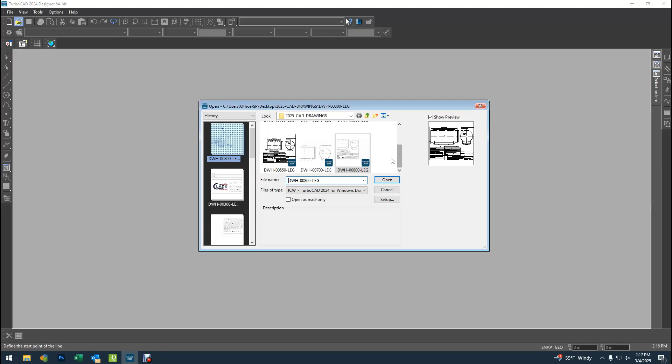In this video, we are going to do some finishing touches to some drawings that we've completed. I'm going to go ahead and open up the 800-gallon tank. I'm going to do the finishing touches to this one, and then you're going to follow along with the video so that you can do the finishing touches for all of the others in this series that we worked on.

The first thing I want to do is show you something to begin with. Going forward, when I send you these sketches, they're going to be just for reference on your spacings between your openings, your overall dimensions, and your dimensions between your supports. I don't need you to make any edits to these because these sketches are pretty old and a lot of this stuff under specifications has changed.

So I meant to tell you that and I forgot to. But that's okay. I had to do a lot of edits today to the specifications table anyway because I had to make some changes to reflect some new things. So I've got all of this changed the way that I want it, with some new ways that we do things. Some of these thicknesses have changed on some things in the construction.

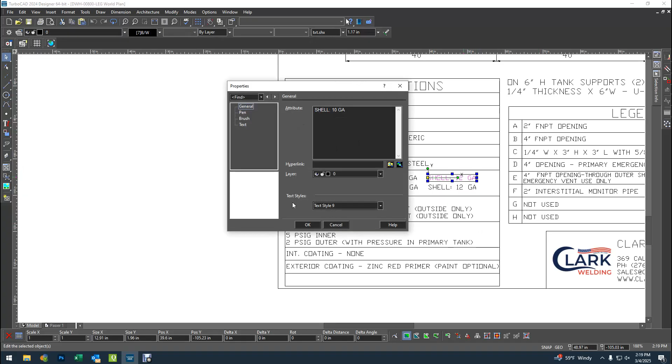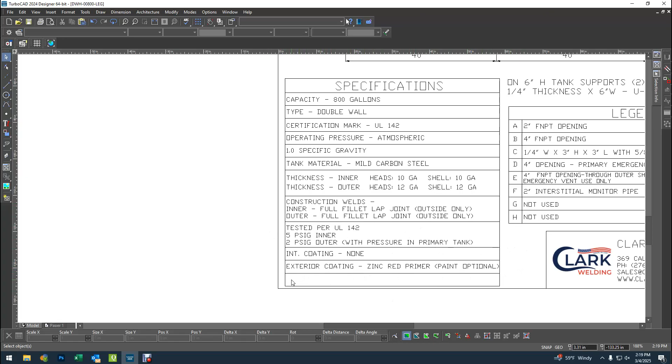I wanted to give the end user a little more idea about the type of weld that we do, and the test is different now than what it had been. I made some additional notations about the primer and just rearranged some things, and allowed myself an extra line in case I'm working on a special project and have to say anything in the spec that someone might need to know. I've got an extra line there.

And in the legend, the only change I did was I scooted this over. But when you get your new templates, all of this is going to be reflected in there. So the only thing you ever have to change is your capacity. You want to make sure the capacity here and here matches what you're drawing. You don't have to make any other edits there.

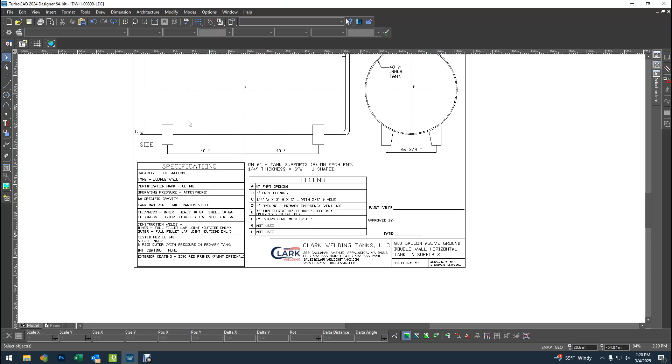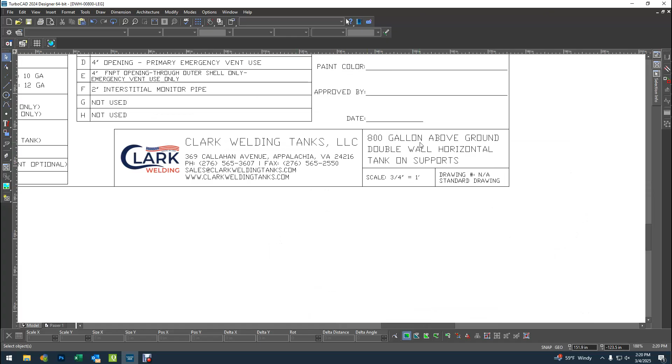This one is tricky because normally I do want this in the upper right corner. However, we're constricted to space here. When we go up to the next size, we're going to be working on a different scale where there's going to be more space here to draw on. But since this is the biggest one in the scale, everything is very tight.

So you won't have to rearrange this in the future, but I'm going to today just to give us some more space, because I want this label that says 'side' to be up at the top, and I want the label that says 'end' to be above this. I always want the end label to be in the upper right, and I want the side label to be in the upper left above what you're drawing.

So I need to make a little more space here. You're going to see me move this and this, but that is for this drawing only. You won't need to move it for your other drawings—you'll have plenty of space. However, if you do get in a place where your space is confined, you can move those if you have to. So I'm going to move this down just a little.

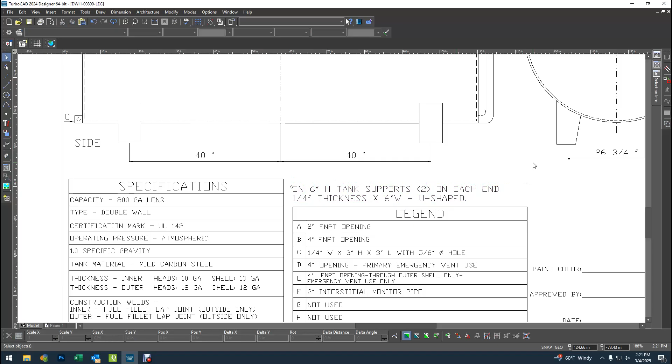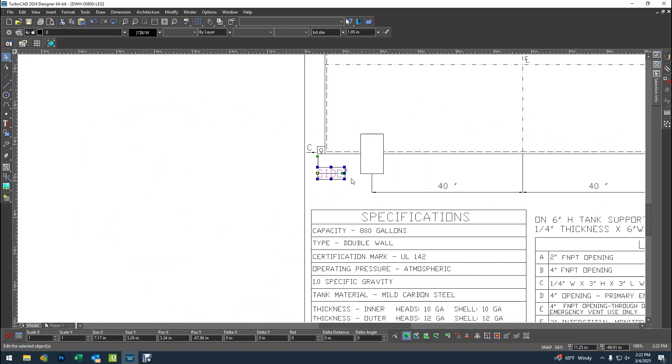And I'm going to take this group of text and just put it over here. This is going to give us some more space at the top so we can do our side and end labels. So I'm going to move this out of the way—I'm just going to scoot it over.

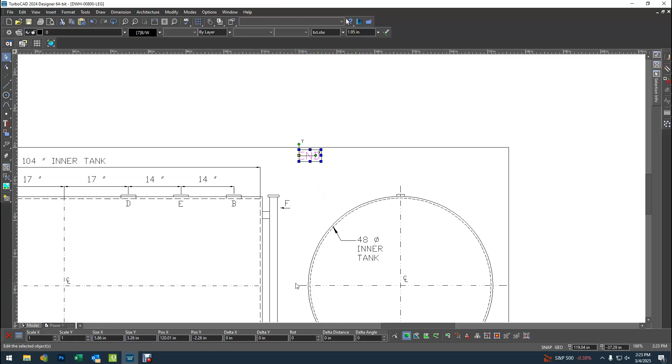I'm going to look at this. I'm not going to drop it, but I'm going to see how we align. And it looks like position X, if you can see down at the bottom of the screen, is 120.01. So I'm going to take it back up here and put it at 120.01 for position X, which gets the end of this in line with this. All right, I want to pull all of this down.

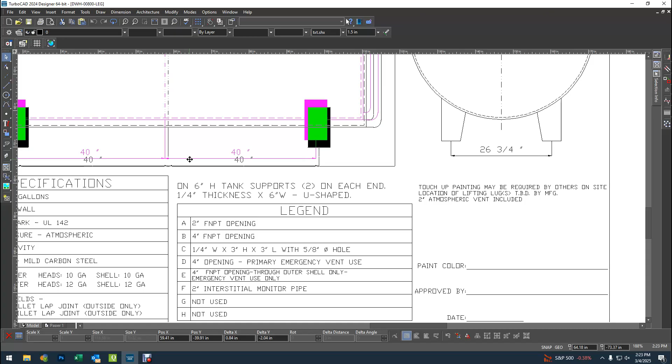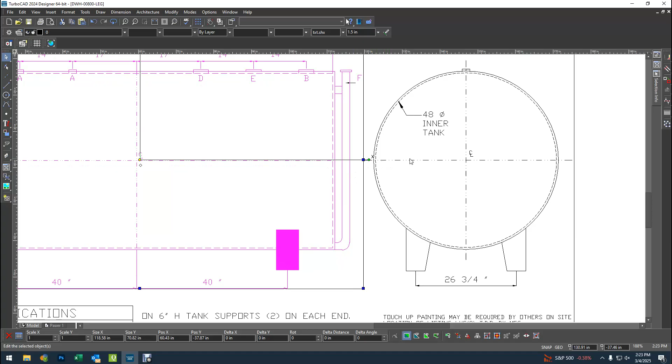I'm leaving just a little break between the dimensions and the specifications box. I'm a little too close to that border, so I'm going to try to make some more space here where I can pull, and also try to align these center lines up. I kind of want it even with that center line.

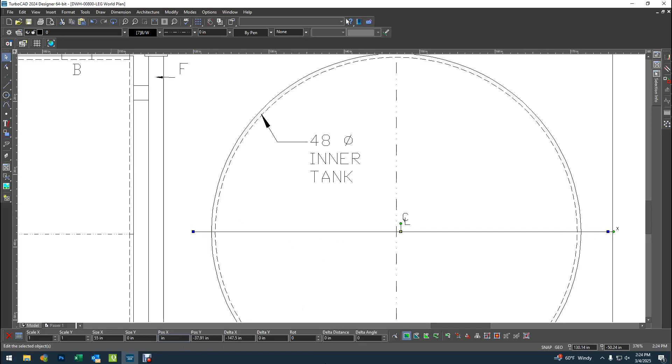I think this is a little big. And this is probably my fault because I'm the one that drew this, but if you look, this is just a little wide here compared to over here. I'm going to shorten this whole line down from 147.5. I'm just going to make it 145.

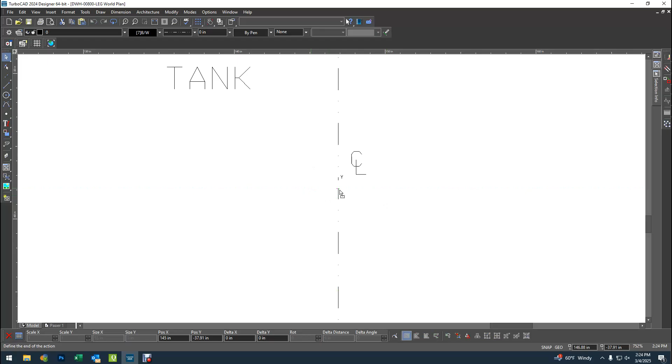Now I'm going to hover my mouse over this yellow dot, and I'm just going to snap it. See the pink diamond in the middle? I snapped it right in the center, and that makes us just a little bit more room. Because this one is so tight, we have to utilize all the space that we can.

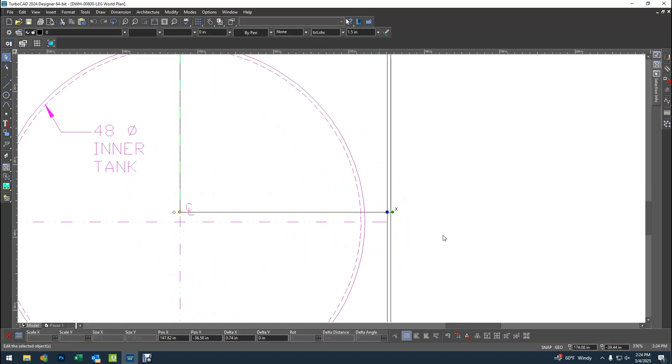So we're just going to slowly drag that over just a little bit. You're not going to run into this on the ones that you fix. I'm fixing this one for you, and you're going to fix the others, so you won't run into this, but I'm just showing you how I do it if you run into a situation where things are tight.

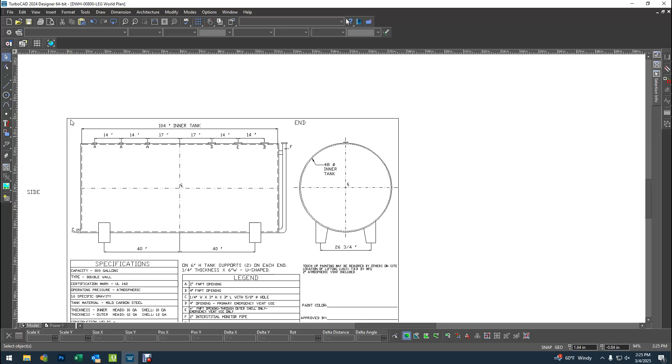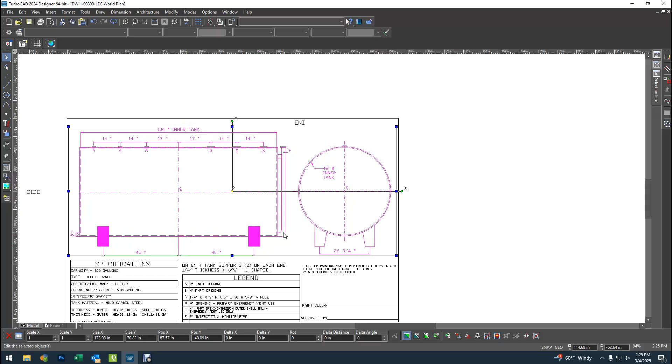I'm thinking we've got more space to pull all of this down. So I'm going to start over here, draw a rectangle around all of it, and deselect. I'm just going to gradually pull this down. Looks good, I'm going to drop it. Okay, I'm going to drop that and leave it alone now.

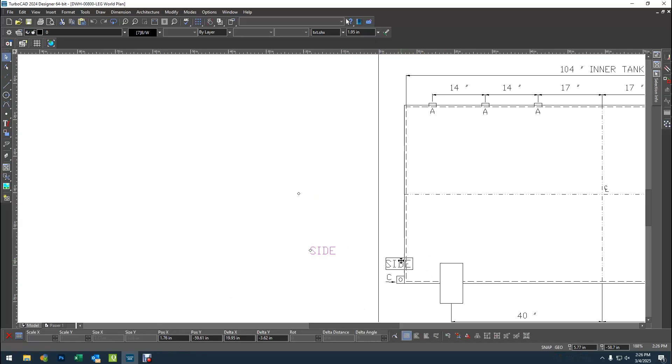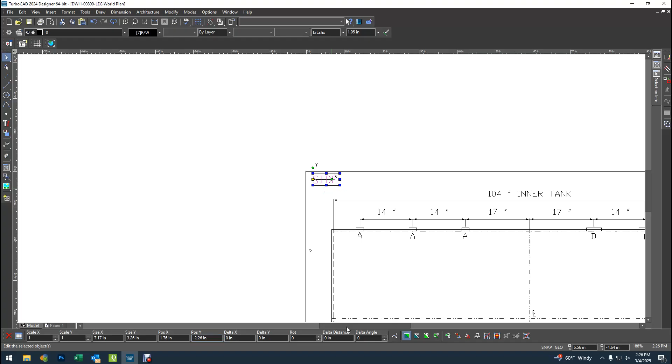I want to put this side up here, and I'm looking at the position. I'm paying attention to position X, left to right. I want it positioned at 1.76, but up here the same as Y, minus 2.26. So 1.76 minus 2.26. If I didn't want to do it that way, I could always go to Modify, 2D Align, and Middle. Either way you can do it.

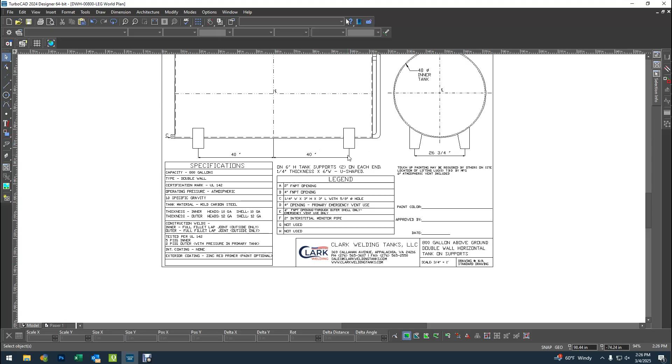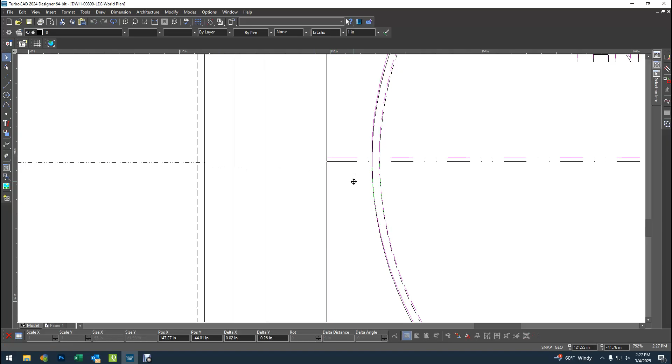All right, right here our center lines are aligned pretty good, we're a little off. I'm going to drag this one on down. I want those center lines to be real close together so we know we are in good alignment. But there's something still wrong.

These legs look longer than these legs, so we've got to find this out. What's going on with this? All right, so your legs always measure from the bottom of your tank to the base of your leg. If you're watching where my mouse is going, bottom of the tank to the base of the leg is always 6 inches. I don't think we have 6 inches here.

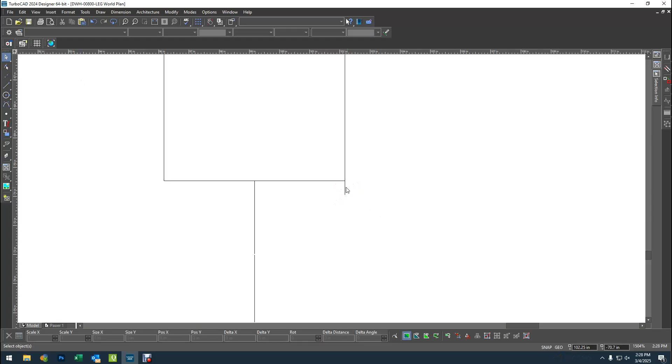Let's take a look. I'm just going to use a temporary line to measure 6 inches. Look, we're a little off. How can we fix that without having to redraw this whole leg? I'm glad you asked, I'm going to show you.

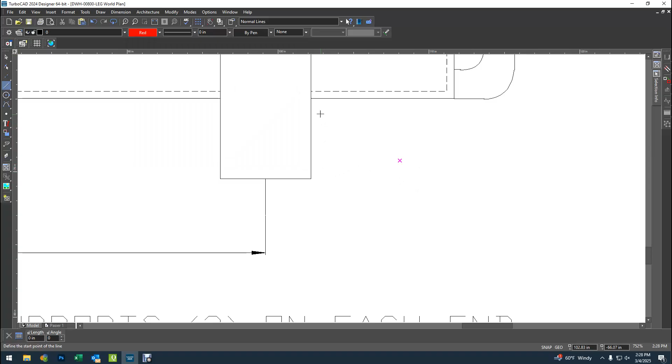Let's use some temporary lines here to do this. I'm going to make them red so you can see them. All right, we know that from the bottom of the tank to the base of the leg always has to be 6 inches. So I'm going to snap this temporary line right here in this corner of the bottom of the tank, and go down 6 inches, 270 degrees.

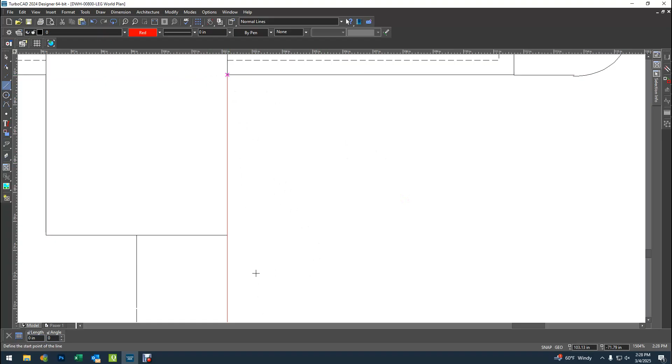That looks like a big 6 inches. Is that 6 inches? No, I have my hands on the wrong key on the keyboard. I'm not using my normal keyboard right now because I ordered a new one and I'm using a temporary one, and I keep getting my hands on the wrong keys. I hope Amazon brings my keyboard today.

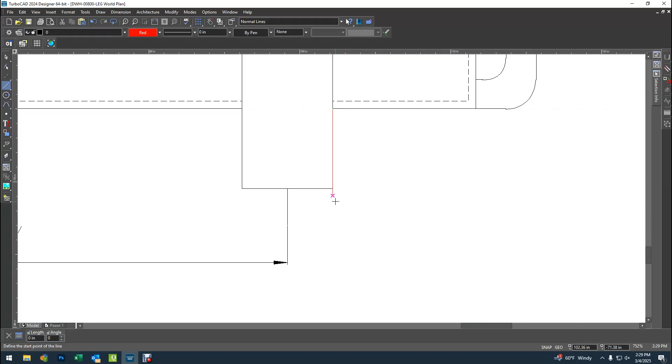Okay, so we did a temporary 6-inch line because we know from the bottom of the tank to the ground has to be 6 inches. Now we're going to do another little temporary line here in the corner, and we can do that at any size because we're going to be deleting it. I'm going to do a 2-inch line at 180 degrees.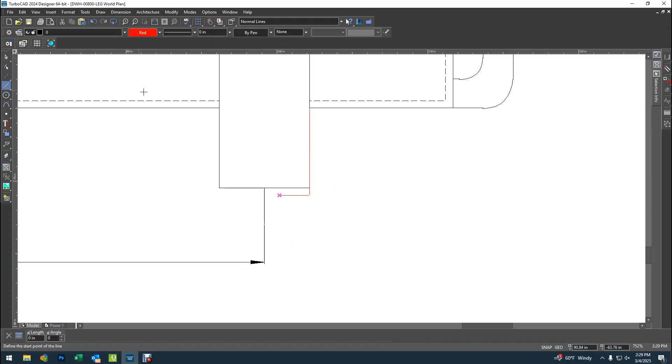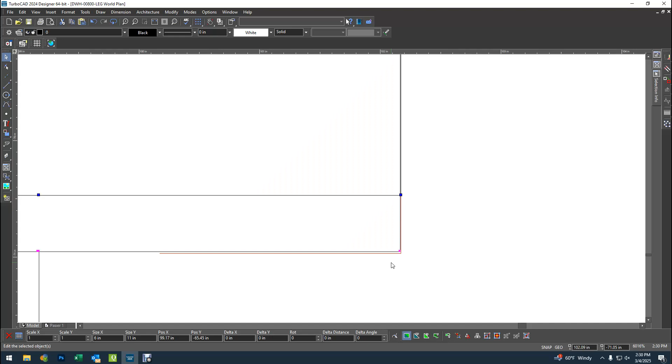Now, to move the rectangle down, all we have to do is highlight it, get close to the corner, and we should be able to pull it down and snap it. Can we? Oh no, I did that wrong, don't do that. I'm going to Control-Z that. Sorry, all right, here's what we have to do.

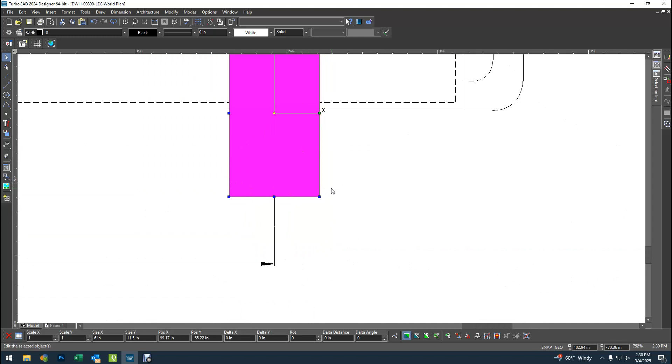We're going to take this little box in the corner, so we select our rectangle, take this little box in the corner, and we drag it. As you can see, when I meet that corner I start getting those purple lines, and I also get to the right of my mouse cursor that little diamond, and that tells me it snapped right in there. Okay, so we're 6 inches to the ground now from the tank. We know that because this temporary line I'm deleting now is 6 inches.

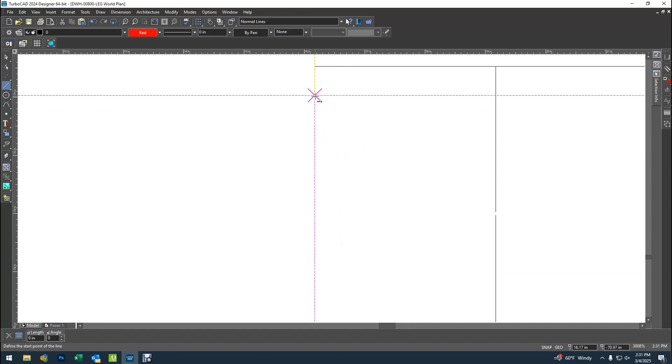Now we're going to get rid of that. We got to go over here and do the same thing. Take this and we're going to do a temporary line right here in this corner. Snap it in. We're going to go down 6 inches, 270 degrees. I'm working in a little bit of fast motion now because you already saw me do it once. 1 inch, any length we want really, because we're going to delete it. And there's the red temporary line.

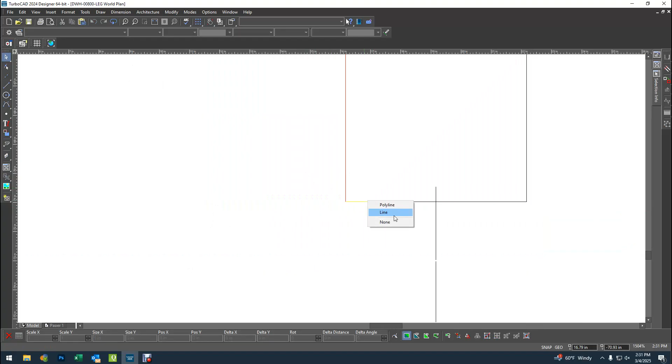And we're going to highlight the rectangle, and we're going to come in, and we're going to pull it down till we get that diamond, and we're going to snap it. And we're going to delete the temporary lines. And so now we know that our legs are 6 inches from the ground.

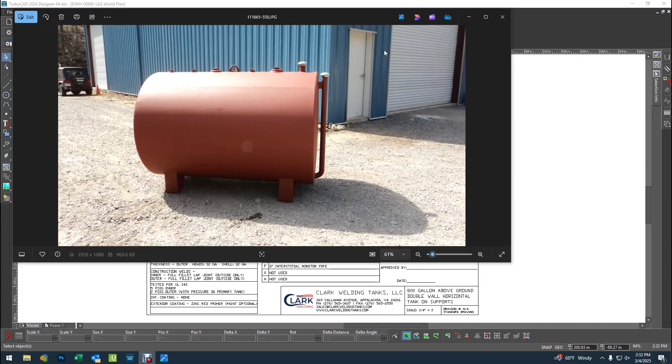And I'll just show you something. Hold on. So this is what I'm saying, that from the bottom of your tank to the ground is 6 inches. Okay, and so you can kind of see what's on that end view. You can see that it goes down, over, and back up at an angle. And so it's kind of what you're looking at. That's the inside of this end view. Down, over, back up at an angle.

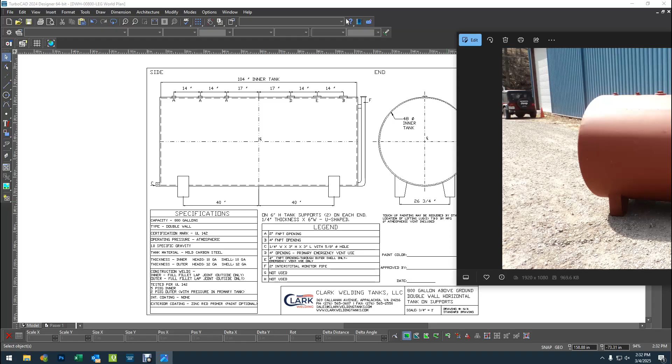So you're always longer out here and you're shorter in here. And so from here to the ground is always 6 inches. I'm going to close that out. We want to make sure that the height of this rectangle, which is saying 11.5 size Y, we always want to make sure that it's the same as this line right here, which is saying 11.84. So we have to make this taller.

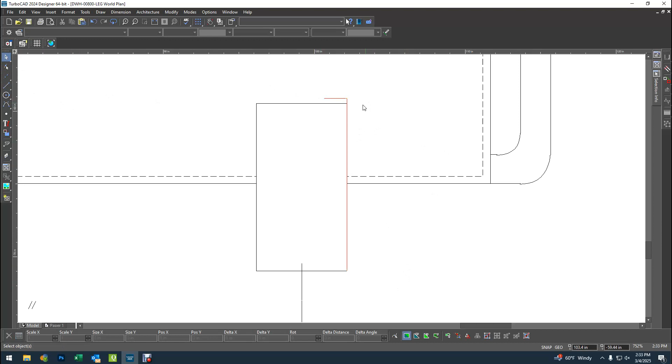Now, an easy way to do this, to adjust this without having to redraw, is another red temporary line. We're going to go up 11.84 and we're going to do 90 degrees. And we'll just do another little leg of a rectangle here, any length that we want, 180, because we're going to be deleting it. Okay, so we've got this temporary upside down L-shaped line, and we're going to take the square corner and we're going to snap it into the corner of our temporary lines. Now let's delete the temporary lines.

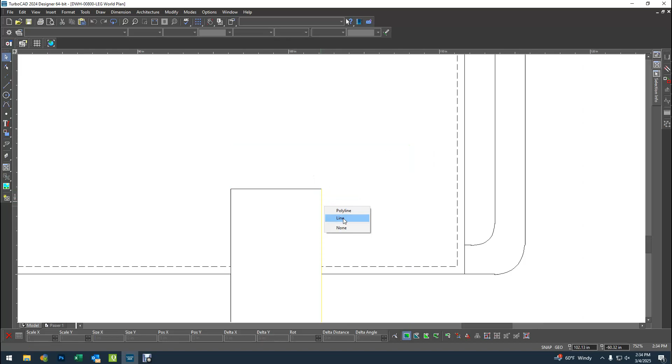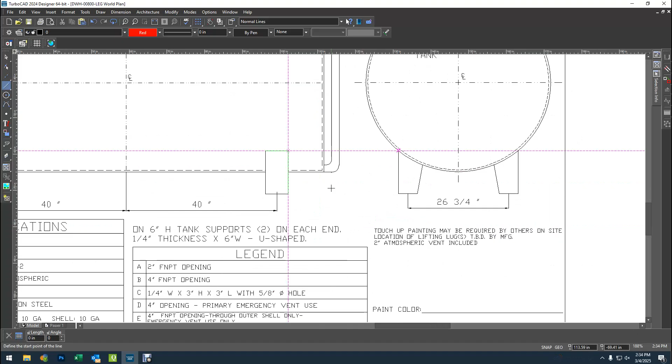And that looks pretty good. Are we even? Let's check. A little off on that angle. We maybe need to do a little more aligning there. But we're pretty even, so I could probably scoot that down just a little bit if I want to be real precise about it.

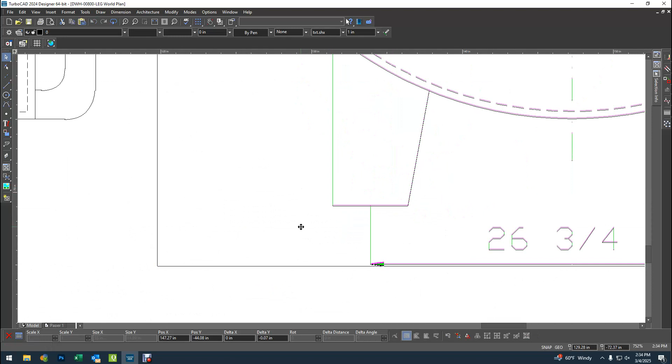I'm just going to pull it down a tiny bit. You don't have to be that perfect with it, but to me, I just want to make sure I'm not seeing it look like it's off any. So I think that's pretty good.

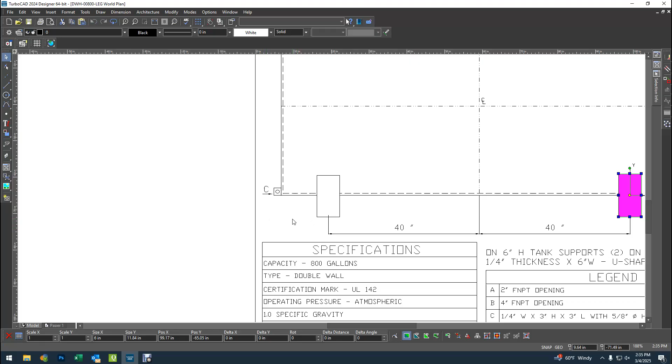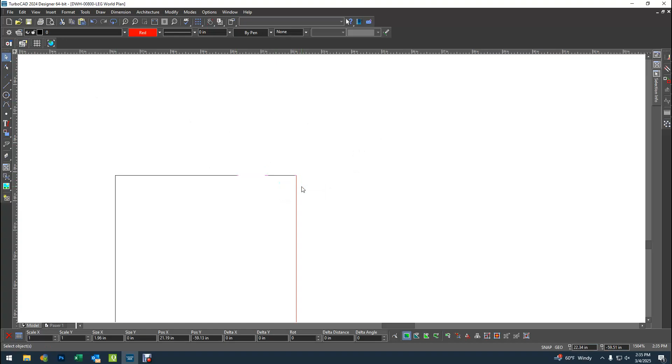Okay, so over here we want to do the same thing. Our height needs to be 11.84. So we're going to do temporary line again. 11.84, 90 degrees. There again, any length that you want. And drag and pull to the corner. Delete this temporary line. Delete that temporary line.

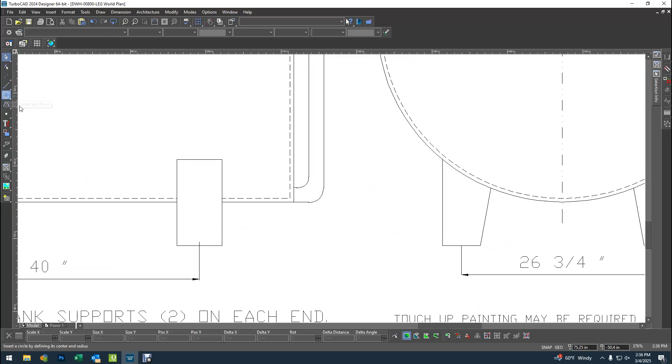Okay, so we got some good precision there in our views now. Our legs are the right height. Our side and end are aligned. And so the next thing that we want to do is we want to work on these dimensions and make sure that we get those good and consistent.

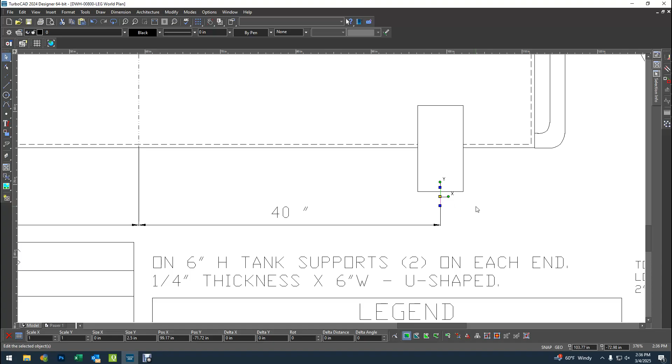And we don't have to redimension them, I don't think. I think we just have to do a little bit of adjustment here to the height. And I'm seeing a temporary line here. I don't know why that's here, but I'm going to get rid of it because I don't really want it on there. I'm assuming it was the temporary line, so we're going to get rid of that and those two and make them go away.

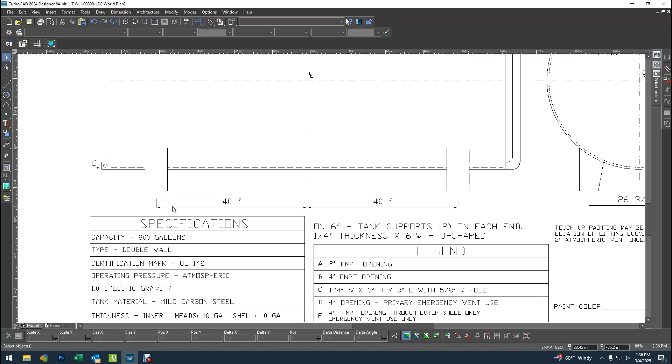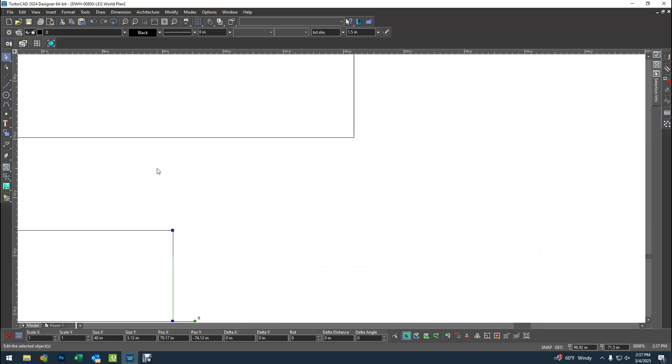And I should be able to just pull and snap now. Yes, and it has been taking me a couple of tries to get it to snap in, or at least get it very close. See there, it's very close, but it will take two times. You've got to select it, pull it up till it snaps. Select it, go over here almost to the corner, pull it up. You're snapped in pretty close.

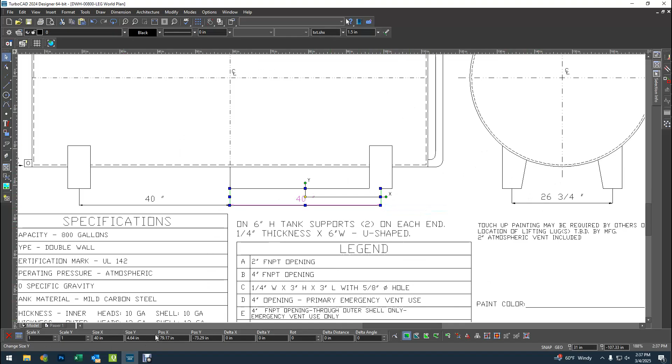That's good. Let's look at the height of this versus the height of that, because to me this one looks a little taller. The height of this is looking at size Y, we're at 4.64. I'm going to jot that down, 4.64 inches. I want to make this one, the height of this one, be 4.64 inches as well.

I don't know what we got going on here, but I realized I drew this, so I'm sure it was my fault.

This is 4 inches. I'm going to get rid of this and redo it. Okay, let's go to Dimension and Smart, and we're going to find this invisible line that we had.

Oh, that's outside to outside. We never do outside to outside. We always do center to center.

This line right here at 31.75, see how it goes from outside to outside? I'm going to get rid of that. I'm going to draw an invisible line from center to center. So here's the center, you can see it snapping in, and I'm going to draw to that center. If you look down at the lower left, it is 26.75 length. So that's good, I'm going to make it invisible.

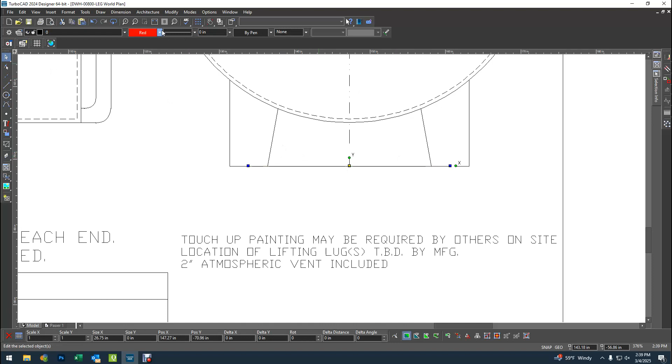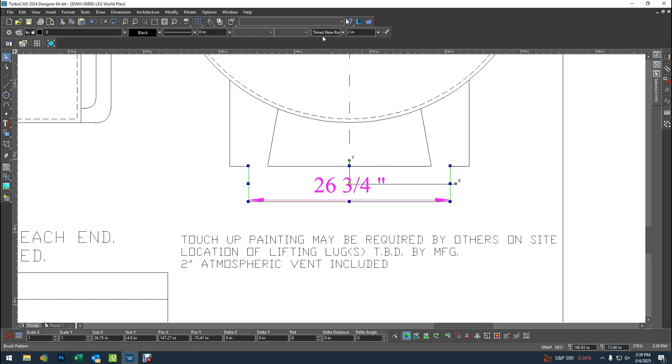And I'm going to redraw that dimension. Dimension Smart. And I jotted down for the height earlier 4.64 in length. It's 4.64. And we will just change that font, txt.shx, and 1.5.

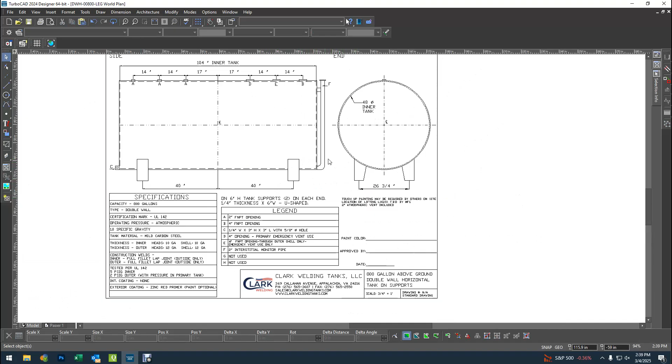Very consistent, everything is lined up good. Everything is even. So we've got that finished. I'm going to save that. Everything else looks really good here.

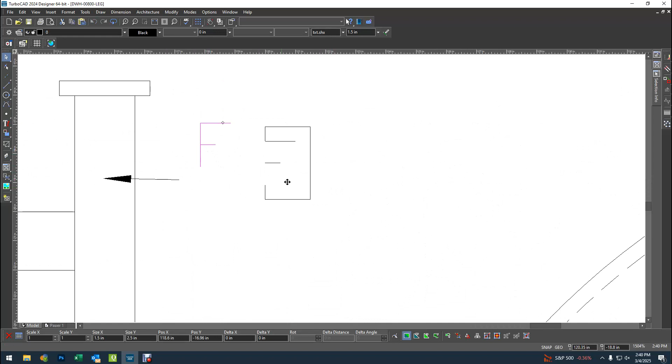Oh wait, we need to fix E and F. We got to get these fixed. They're just not looking right to me. I'm going to pull this over out of my way.

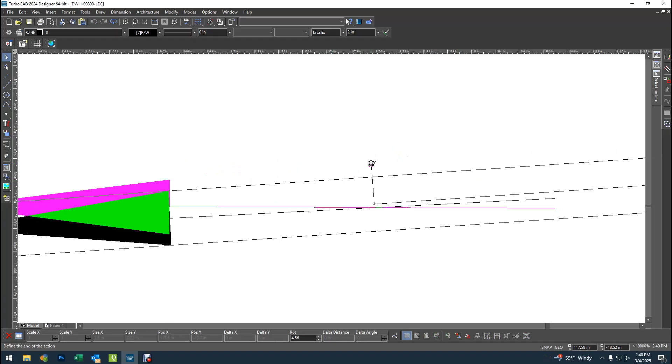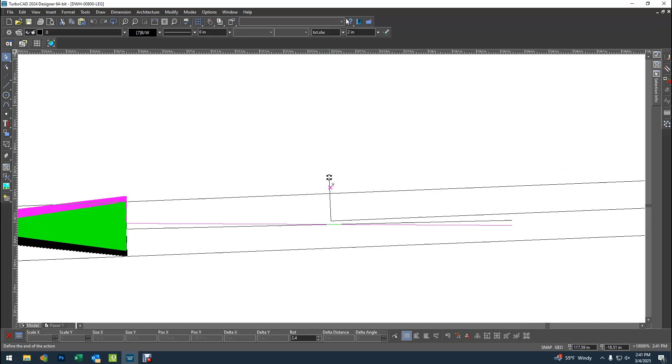I'm trying to make this arrow a little more straight. We always have trouble with these leader arrows. See, I'm trying to use this green. Since we can't get it straight, we may just do it angled. It's really hard to get it straight. Let's try this one.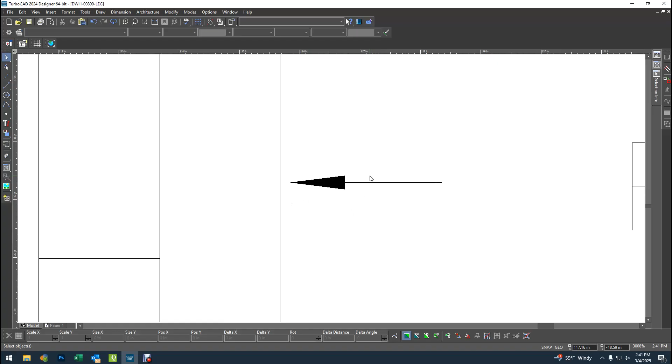Okay, it's actually straight. Now our rotation here is 1.03. I'm going to jot that down because we may be able to use that on the other one, and if we can't, we'll just copy paste the other one. So if you see how I did that, I went over here to this green and it makes like a rotation tool, and I just kind of rotated around until this line straightened up because the 0-degree angle didn't really look straight.

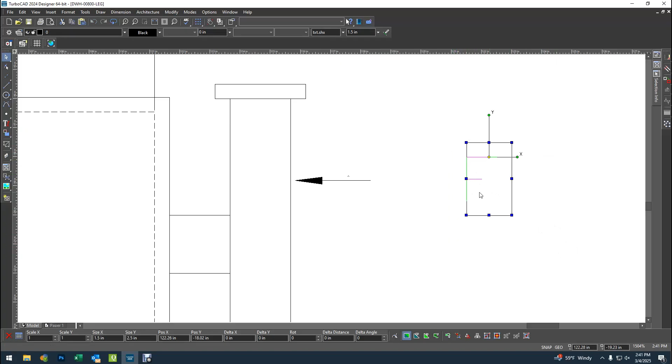And I'm going to take that and put that there, and I'm going to grab this letter F and just kind of put it beside of it. And we got to do the same thing down here. We don't have a lot of space over here to do that, so we may have to do an angled one.

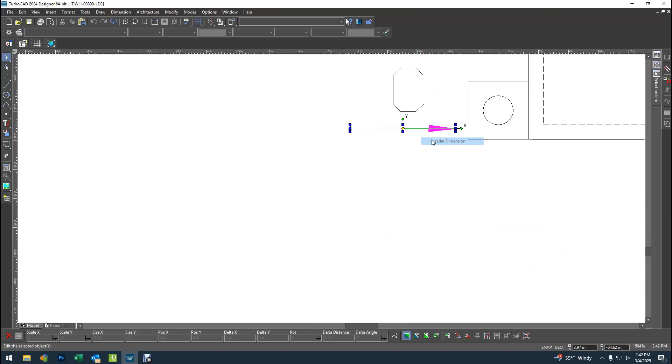I'm going to get rid of that. I'm going to pull this C over. I'm going to Control C to copy that, and Control V to paste it.

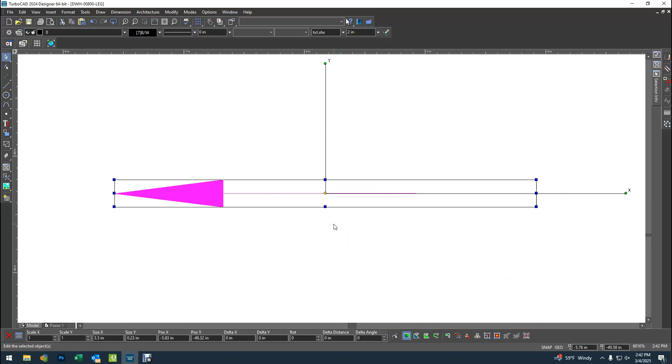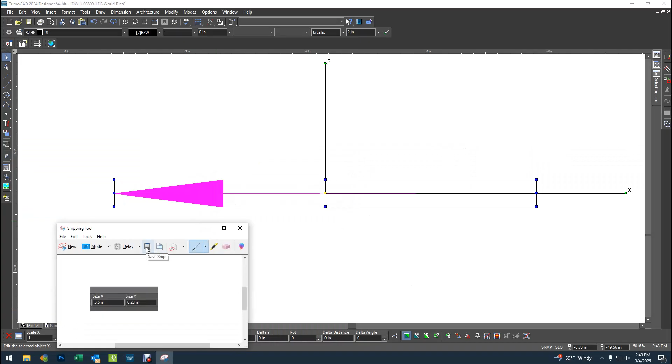Now remember what I told you about mirroring when we mirror something. I use my snipping tool when I do this, my Windows snipping tool, but you can just jot them down. We want to get that size X and size Y, so we make sure that when we mirror this, we're the exact same size. I usually do that, you can jot them down if you want to. It don't matter.

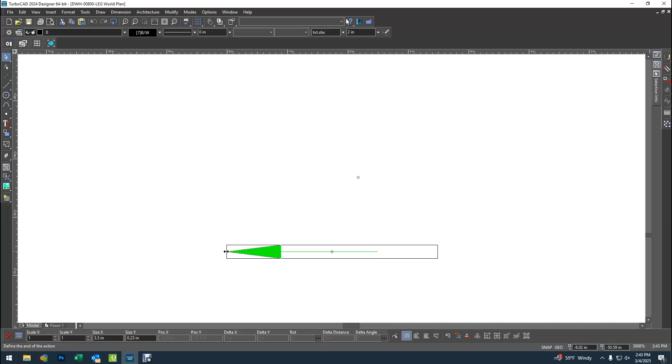All right, so to mirror, we go over here on the center square marker, and we grab and pull, and we drop it, but we don't let go of it. We tab down. X was 3.5, and Y is already at 0.23. Okay, so that made the arrow the same size as the other arrow.

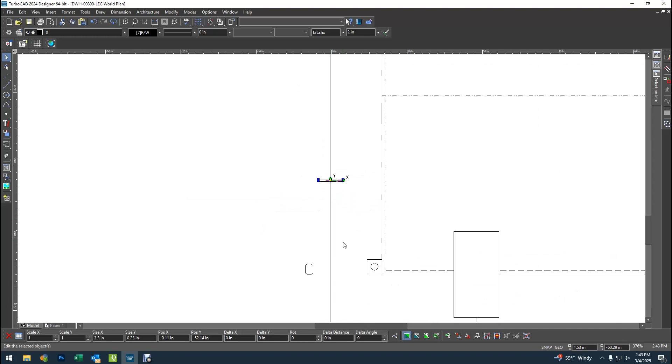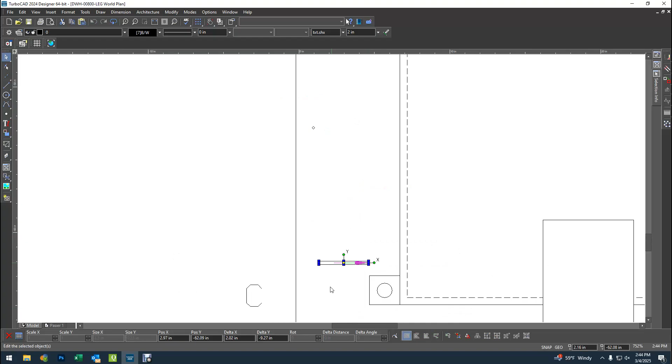And we're going to take it and pull it down here. We may not have, I don't think we're going to have space for this. But let's check. This is difficult. Okay. We may have some space.

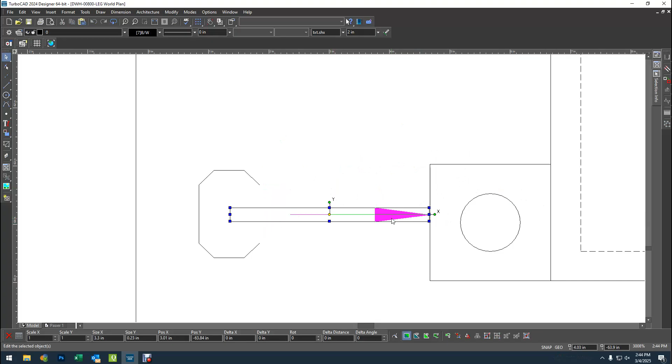We never want to get anything outside of the square because it'll use another piece of paper when it tries to print it, so we want to make sure that everything we do is in that square. Okay, we're finished, we're finished. We've got all the final touches done here on this one.

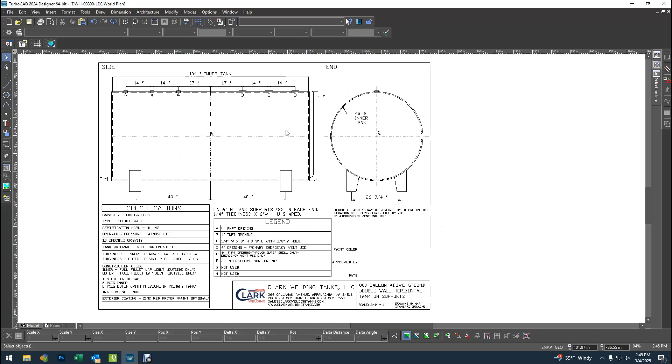And like I say, you don't need to move this text on your other one because you're going to have plenty of space, but if you do find that you need to move it, you can go ahead and move it. So in summary, in this video, what we did was we lined everything up good as far as our label, our side and end view. We lined the tanks up.

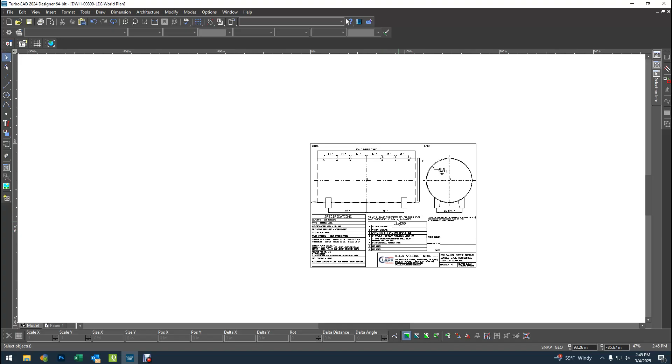We made sure that the height of your leg on your side view is the same as the height of your leg on your end view. It has to be the same. And we made sure that we had consistency in the height of these dimensions. We also fixed our arrows, which those arrows are really hard to deal with, but we did get them fixed.

So we've had success today, and I will give you this video to follow along with, and you can use this video to fix the others. Thank you.